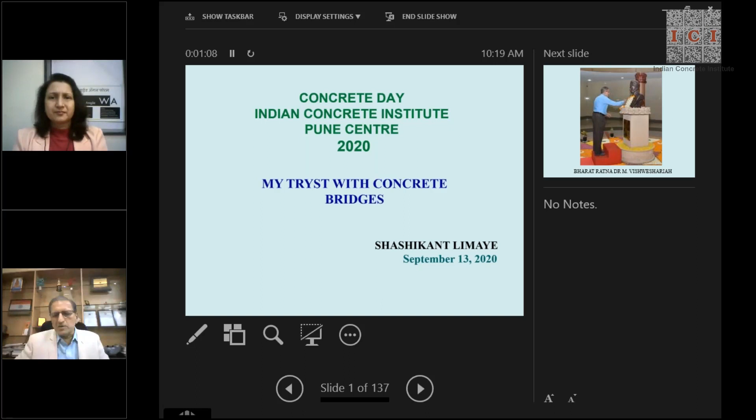Let me first of all pay respects to one of the greatest engineers in India, Bharat Ratna Dr. M. Visvesvaraya, who is supposed to be the father of engineers in India. 15th September happens to be his birth anniversary. He was born, I think, in 1862, so we are very close to the 160th birth anniversary of this great son of India. Let us pay our respects to Dr.

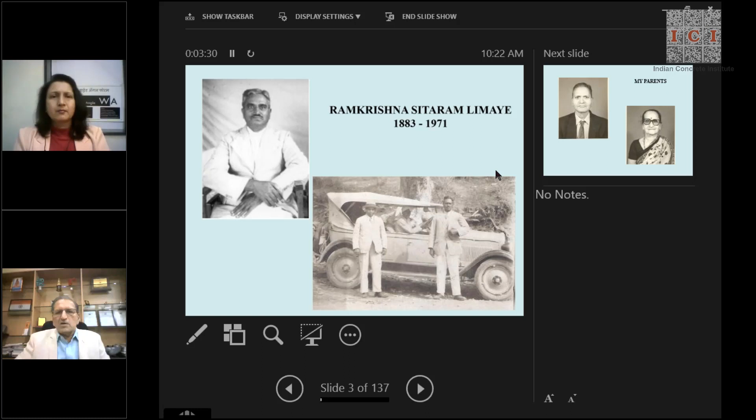My father also was an eminent engineer who practiced in Pune, and he was a very reputed consulting engineer and valuer in the city of Pune, Mr. G.R. Limaye. He happened to be the secretary of the Institution of Engineers in India, Pune Centre, which with his great efforts was established in today's condition, that is the construction of the building and other assets. He was secretary for, I think, more than 8 years. At that time, I remember in 1961, as a boy, I accompanied him to Bangalore to attend the annual session of Institution of Engineers.

And the famous Sir M. Visvesvaraya happened to be the chief guest at that Congress. So I had an opportunity to have a look at Dr. Visvesvaraya.

Now I'll just speak about my gurus. Dr. E. Sridharan, I consider him as my greatest guru, because working with him for 8 years, practically 24/7, has given me so much knowledge and confidence, which is perhaps unique in our profession. That is what we'll be talking about partly during this presentation, about the Konkan Railway Project, how we went about it and how we were able to accomplish it in such a short time without any foreign assistance in terms of consultants or even equipment, except for a small portion of equipment which was brought from Sweden for constructing the tunnels.

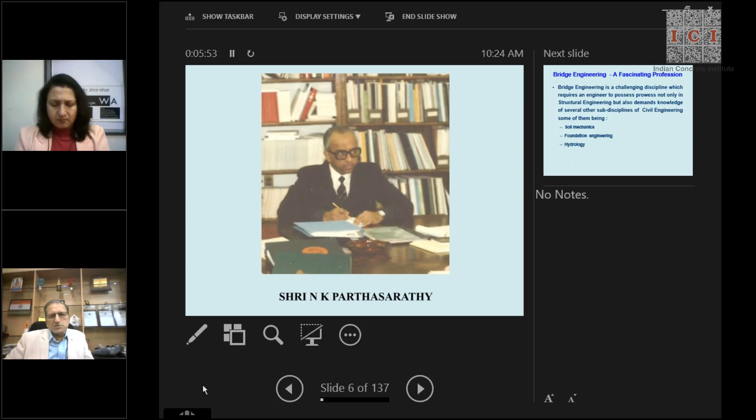Coming to bridge engineering, as all of us know, the biggest component in bridge building is concrete in one way or the other. In fact, you'll find that more than nearly 80% of work in any bridge is concreting work of one type or another. Bridge engineering is essentially a very challenging discipline in which an engineer possesses not only prowess of structural engineering, but also demands knowledge of several other sub-disciplines of civil engineering, such as soil mechanics, foundation engineering, hydrology, etc.

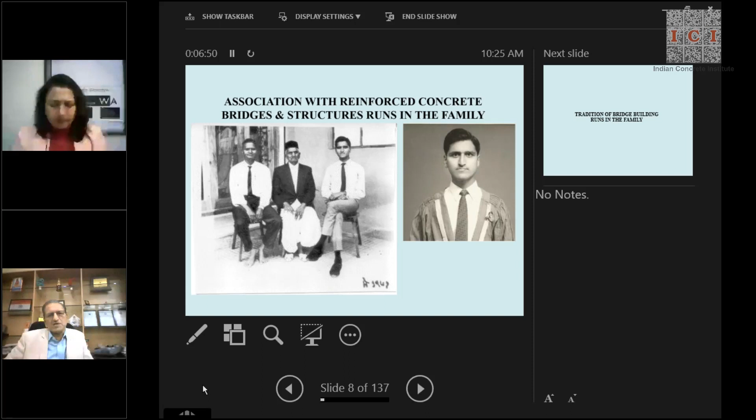When I graduated in the year 1971, fortunately my grandfather happened to be there, and this is a very historic photograph of 3 engineers, the 3 generations of engineers in our family - that is my grandfather, my father, and me. As I said, the tradition of building bridges runs in our family.

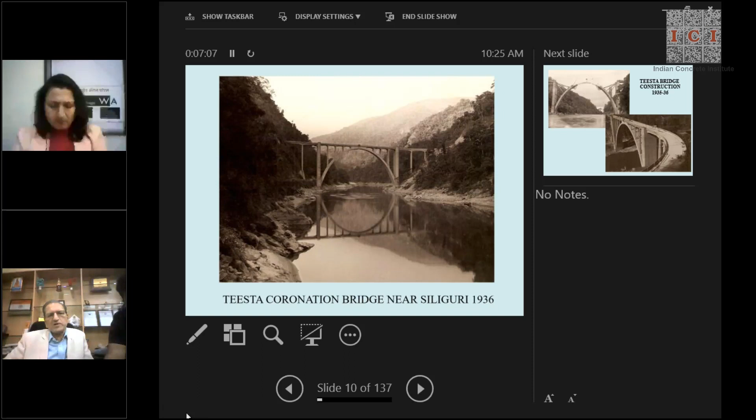This is a very beautiful bridge which exists today also, across Teesta River, very close to Siliguri, constructed in 1936. You can't believe that such a bridge could be constructed in 1936, with a span of 200 feet and a height of 300 feet.

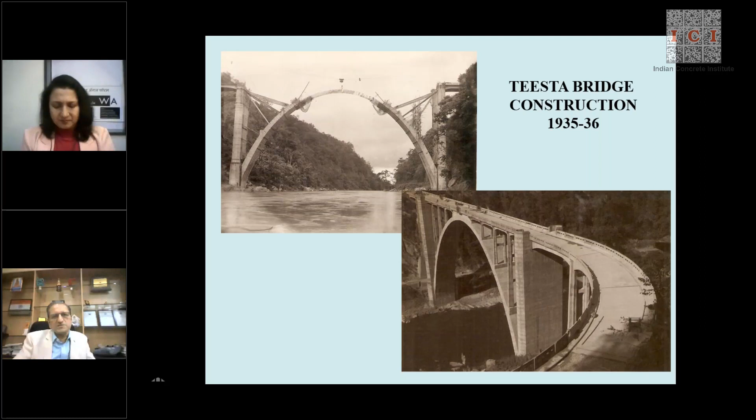You can also see the quality of concrete. He always used to tell us that the type of precautions they used to take in making concrete was very great, and no low quality work was accepted. There used to be British engineers at senior positions, and they all used to stay in tents at such sites. This is a finished bridge which exists today also.

If somebody goes on that road towards Gangtok, you can find it very first when you enter the Teesta valley.

You can think that at that time, although the analytical techniques of today were not available, everything was done on slide rule and log tables. They could conceive and construct these types of bridges with great confidence.

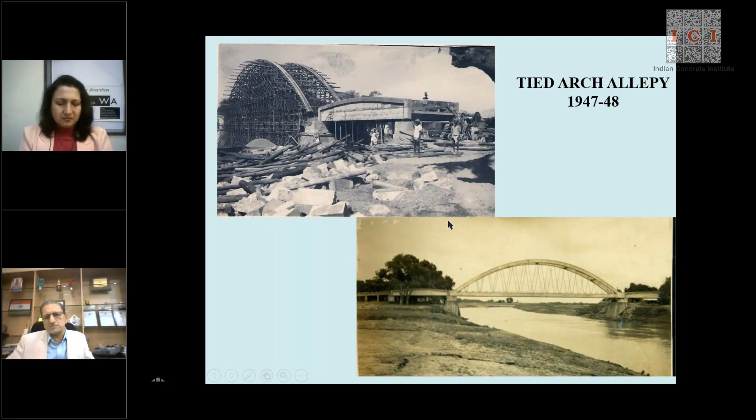In fact, the problem arose with the open spandrel spans because of cables and those problems, because they didn't have that kind of material at that time.

What today's engineers think by looking at computer analysis is that if the pier sinks by 3 inches, so much movement will come into being. To my mind that is not true, because there is high redistribution which occurs in such kind of structures.

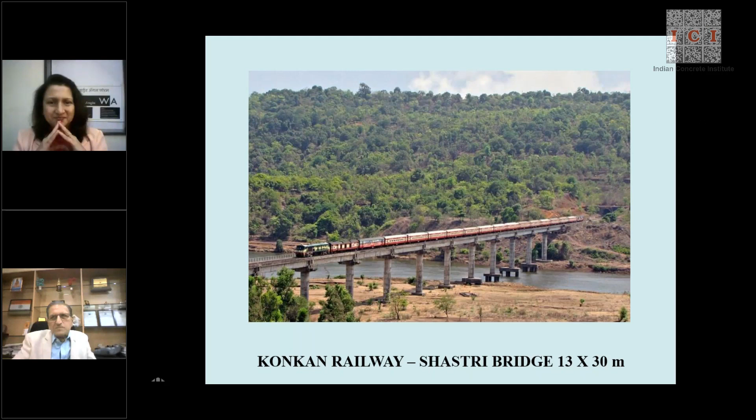Now coming back to my career in the railways, I joined in 1974 and underwent training for nearly 2 years of various types. Then my first posting was in Ahmedabad.

At that point in time, Sabarmati Bridge had developed problems - it was basically mass concrete piers on well foundations, and two of the wells got tilted. Therefore it was decided to replace that bridge with a modern structure.

That was the opportunity to introduce RCC in a big way. Those mass CC piers and wells were in between the existing piers, because in railways in such areas we can't change the alignment. One side is the Ahmedabad Yard Complex, the other side is Sabarmati Yard Complex, so we can't change the alignment.

We had to construct on the same alignment, and therefore we thought of having pile foundations, because any well foundation between the existing wells could have endangered them further due to sand blow and similar issues. So this was, to my mind, the very first bridge in which RCC cast-in-situ bored piles were used in a scourable Sabarmati bed, because earlier the wells had tilted only because of scour.

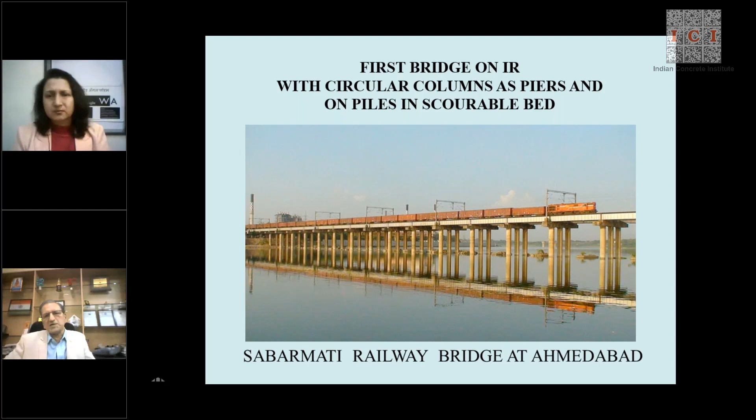Despite that, with great confidence, this was envisaged, and this bridge is standing today after nearly 45 years. It is in service, and there are 3 tracks on top. The idea was that each circular column will support 1 track.

This entire job was done in a matter of 2 years, because particularly in such situations it is necessary to construct it preferably before the next monsoon.

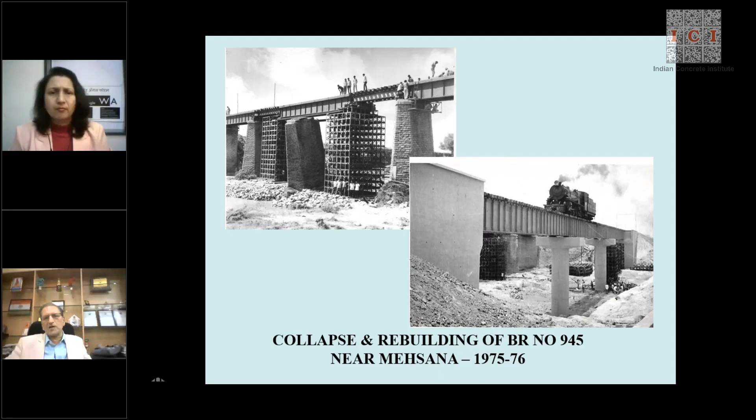This is what happens in the railways sometimes. The entire bridge, 14 spans of 60 feet, just vanished within 1 minute on the Rajdhani route, on the Daman-Ganga river near Valsad, north of Valsad.

This was a challenge because Mumbai-Delhi, as you know, was the busiest route even at that time, 1976, fully electrified. The loss every day was 2 crore rupees, and it had to be restored on a war footing.

Our Ahmedabad design office was one of the best offices in Western Railway, and we used to do all designs internally - there were no consultants at that time. Since half of the monsoon was yet to pass, we were in the middle of July, and therefore we needed something in the center of the bridge which would stand the test of another flood, because the Daman-Ganga's catchment gets very high rainfall.

So we thought of a pile trestle, done with RCC piles, bored and cast in situ, socketed in the rock. 4 piles were to support each support of the girder.

The girders were what are called Callender-Hamilton girders, 150-feet span, bolted and assembled at site and then launched by pushing forward. There were in fact 3 trestles to support 2 girders, and this whole operation was finished in a matter of 2 months. By September, this line was recommissioned, and the new bridge was constructed in just about 8 months along the existing alignment.

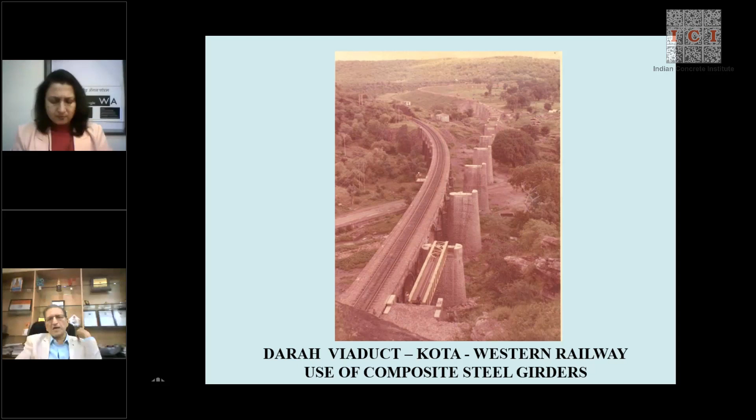Thereafter, I had a great opportunity to work as a professor at the Indian Railway Institute of Civil Engineering. I consider that after having field experience of something like 10 to 11 years, it was a boon for me, because I had seen the difficulties in the field, and once you have field experience, you know what to look for.

The Indian Railway Institute of Civil Engineering had one of the best libraries in the world as far as railways, railway bridges and tunneling were concerned at that time. We used to invest about 5 lakh rupees every year to buy books, and I happened to be on the committee to select books for that library.

At that time, another... can I interrupt here for a second? Yes, no problem, yes.

Since we've had this wonderful start where you talked about the heritage of our journey as a nation, recognized as one of the largest networks of railways, I have a question. We are now in the 70s as you're talking - would you say that by this time we already had a pool of talent in the country trained and ready to handle all the challenges? At what stage do you think our country was in the early 70s as far as railways and development is concerned, according to you?

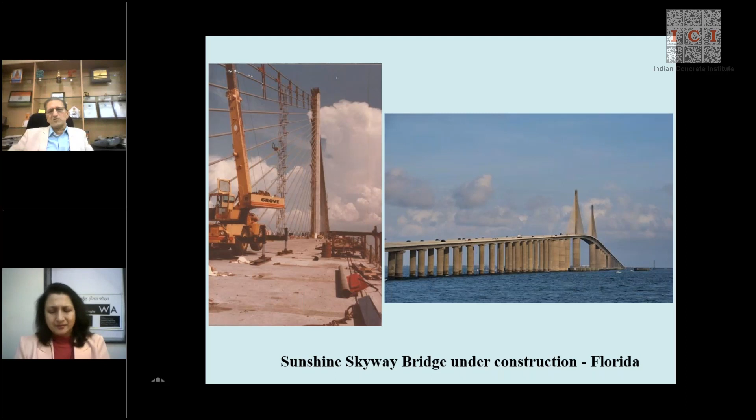That's a fantastic anecdote, sir.

The great experience I had about pre-tension girders came handy in Konkan. This was, I think, in Virginia, a precasting plant where they used to manufacture precast girders for bridges, 60 feet, 80 feet, 100 feet, on standard designs of DOT. You just have to telephone and order - I want 80 feet HS80, HS40 or whatever loading - and they are just available. They'll be put on the trailer and sent to your site. So that was the great advantage of standardization.

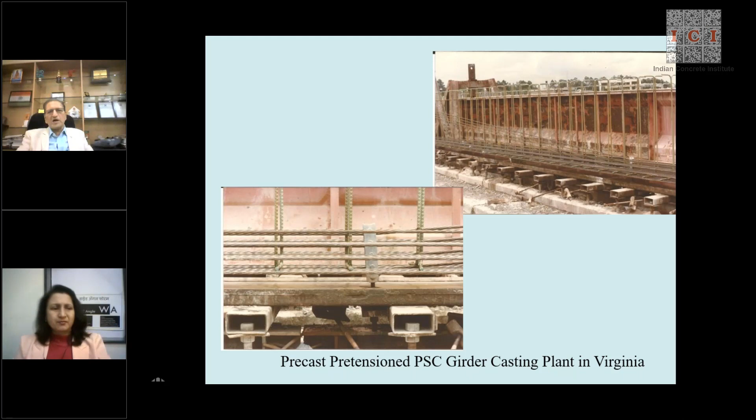We think that in pre-tension we can't give a profile. But here is an example where a profile is given by a deflector which is attached to the base - you can see at this point - and the cable gets deflected. So that problem was avoided, particularly for longer spans. Once it is cast, this thing is released, and the cable remains there, already embedded.

Now coming to the most important tenure in my life. When the Konkan Railway Corporation was to be established, it was decided to execute this project in a BOT mode. The company was to be formed consisting of partners - Ministry of Railways, State Government of Maharashtra, Goa, Karnataka and Kerala, five partners - and the shareholding was decided. But Mr. Sreedharan, being the member engineering at that time, started building up the organization immediately when he was in the post.

And he selected the initial team, in which I was lucky to be there, because Sreedharan's method was that he used to inquire with all the champions where you have worked, what is your background. So he picked me up for the design and planning of the Konkan Railway project, and that is how I landed in Konkan Railway.

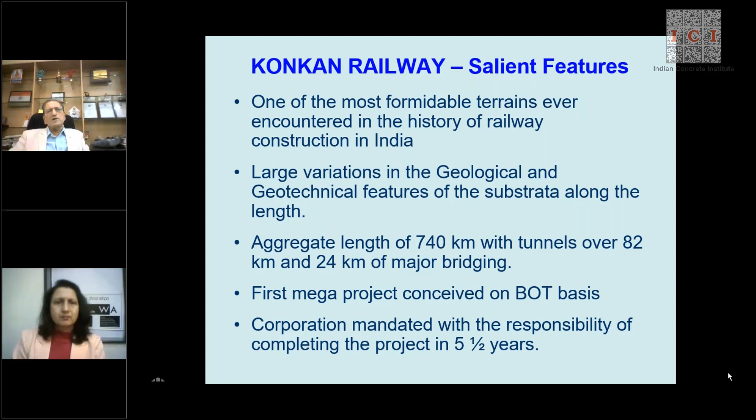There's also a story that this happened on, I think, 4th August of 1990. Sridharan had retired on 31st July, and he did not become MD at that time - he was a one-man expert committee, OMEC. So George Fernandez was the minister, and he used to issue direct orders from his office that so-and-so be posted in Konkan Railway to be relieved immediately.

I happened to be in Pune giving a visit as a visiting faculty that day, although I was senior divisional engineer in Bombay Central, looking after the entire assets of Bombay division in terms of track between Mumbai and Virar, and also the buildings etc. I suddenly got a call from my divisional railway manager that I was required back immediately. But I had just finished my lecture during lunchtime, so I thought some problem must have arisen with the track or some accident must have happened, because such a railway call happens only when there is an accident.

So I immediately went by Deccan Express, and he said as soon as you come to the office, whatever time. I think Deccan Express lands at 7:30, so I immediately went to Bombay Central. He was sitting, so I said, what happened? He said, this is the order, and I'm asked to relieve you immediately. So please, your handing over letter is ready - I have told my assistant, you just sign and walk out.

But I said, what about the handing over? He said, don't worry, you are in Mumbai, so you come back whenever you have time and explain to your colleague what all things are to be seen. That is how I was relieved, and the next morning I had to report in Central Railway, because Central Railway was looking after that at that time.

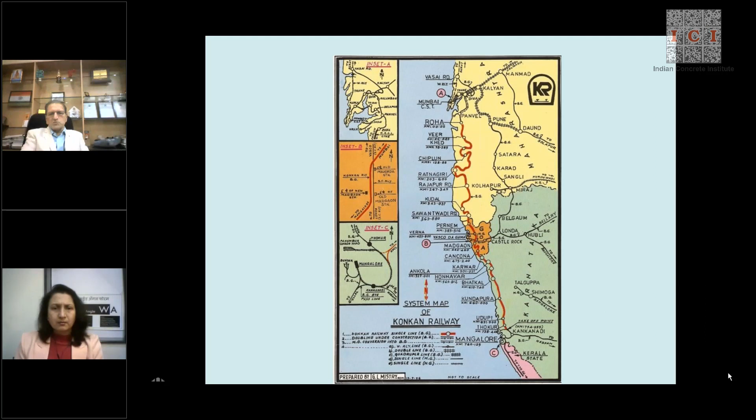Organized structure, first thing was lean but effective. Trust, teamwork, time frame, and delegation. Delegation is the most important word, which doesn't happen in India. Everybody wants power to himself.

Sridharan said no, first of all the chief engineers will be in the field. So all the chief engineers were posted in 7 locations along the alignment, from where they used to operate, and they were given sufficient powers, financial powers, within their zones to decide upon contracts, decide upon land acquisition, and things like that. Then, as I told you, we had complete computer networking, fax, and dedicated telephone, not dependent on DOT.

Modern technology not for its own sake, but to optimize construction and O&M costs, not just for the sake of saying that I constructed a cable stayed bridge on the ground.

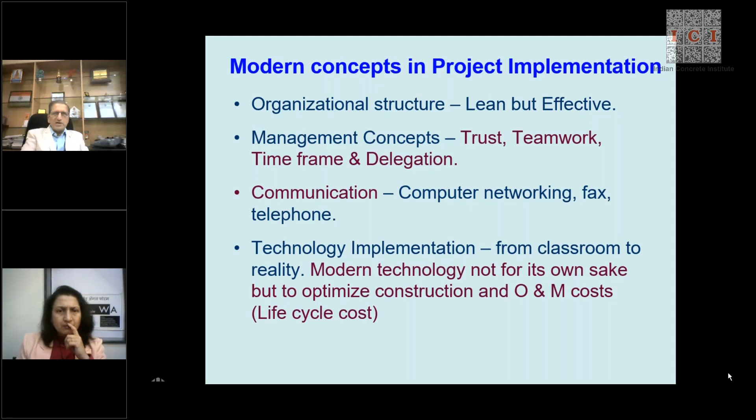That was not done. This was the very first inauguration at Roha in the month of September 1990.

And this photo especially is important because these are the 4 pillars, I call it: Mr. George Fernandez, Mr. Sharad Pawar, Mr. Madhu Dandavate, and Mr. Sridharan. They were the 4 pillars because it was Sharad Pawarji who immediately agreed to this idea of forming a company with partnership of state governments. And that is how the other state governments had no alternative but to say okay and go ahead.

Now the most important item. One question. Can I ask one question before we move on?

Just a simple question. You mentioned that to have competent professionals at all the various locations, you employed competent engineers who would look after their particular territory. So obviously you must have put an ad in the paper, or what was the modus operandi of appointing these engineers, and why did they select to come out of their comfort zone and work in totally unfamiliar territory?

Essentially, at the levels of chief engineers and deputy chief engineers, he got people from railways who were highly experienced in construction, because he knew the Janampatri of each person, having sat as the head of the railways. So he scanned that and got people who had already worked, like a few of the chief engineers had worked in the construction of the third Ghat line between Mumbai and Pune, and the third Ghat line between Igatpuri and Kasara. So he knew everyone, and he had worked also in Central Railway.

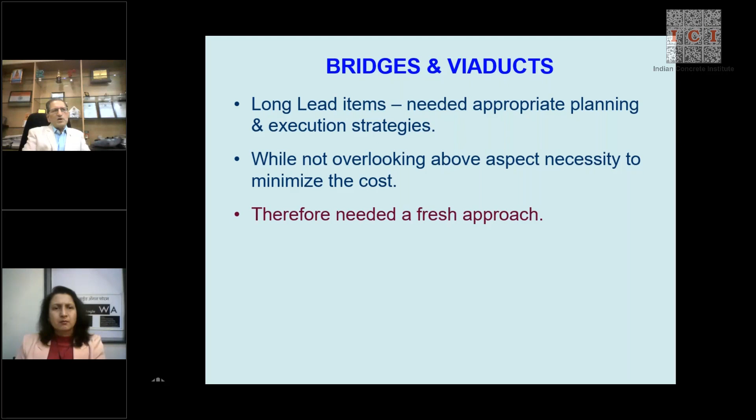Second was also the substructure, which was highly standardized: 16 meter height, 16 to 25, beyond 25, like that. So first was solid circular, mostly up to 16 meter height. Beyond 16 meter, hollow rectangular, hollow circular. Beyond that was tapered hollow. Hollow pier was first time adopted in India.

So we chose a uniform track structure, which gives the advantage that you have the same track on the bridge as on the approach. So you can continue continuous welded rail. The entire thing on Konkan Railway is long welded, there's no joint, no fish plated joint, right? And this gives a great advantage in increase in speed.

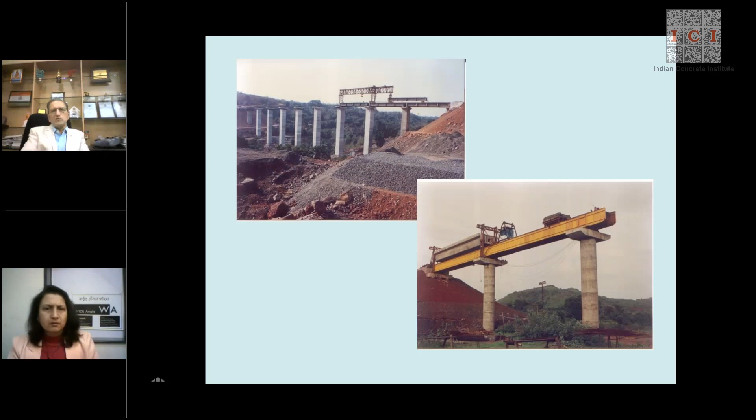The next one is how innovation can be used in difficult times. This is a bridge in Terekhol on the border of Maharashtra and Goa, and also the Chapora bridge next to it, at Terekhol and Galjibag, South Goa, where the port captain suddenly said that an 18 meter clearance between the pile caps was not okay for him.

He said he wanted navigation there. Because of our philosophy, the girders were already cast. At that point he said, no, I want a minimum 26 meters between the pile caps. So I thought over it, and thought why not have H type piers with a central portion of 12 meters. I stretched the 20 meter span to 32 meters and got 26 meters clear between the pile caps.

That is how we built these bridges, where you will find the piers are H-shaped. This is possible due to the moldability of concrete, that I can give any shape to it. That is the thing we want to understand, that concrete gives full flexibility to play with any shape. It depends only on the mold you create.

Then for pre-tensioned girders, how were they produced at site? APCONS came up with a great idea, Mr. Joshi, that we'll have a prefab casting bed consisting of U sections of concrete which are assembled together at site by pre-stressing. There are 11 sections.

After casting, they can be taken to the next site. It is inside this that the girder is cast, and it acts like a reaction frame too, just like we do with a steel reaction frame. The cycle time was 48 hours.

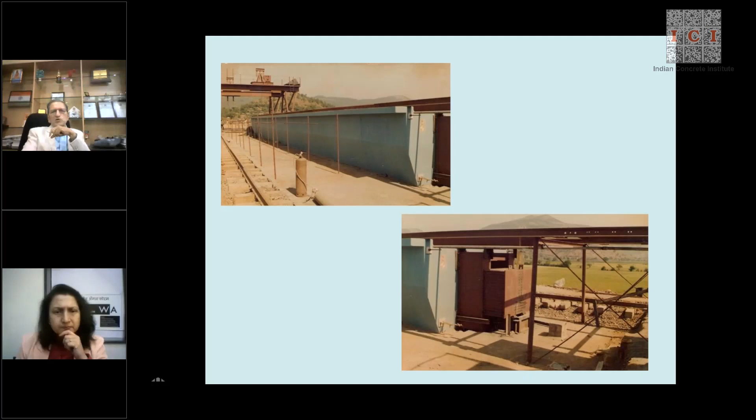These were 20 meter girders, each weighing about 78 tons. That is how they were produced, put in the yard and simply launched. You can see the finish of that Savitri Bridge, which still stands just like that today, after 25 years, and how open it is for waterway clearance.

This created a lot of dispute, because one year in Mahad a heavy flood came, as it happens every year, and it happened here too. People said that this bridge caused the flood. At that time Sharad Pawarji was the chief minister. He immediately phoned Sridharan Saab, and Sridharan Sir said he would depute Limaye to explain it, because he himself wasn't very good at it, he didn't know Marathi, let's say.

So he said, we'll discuss at site. We fixed up a place from where this bridge and the river could both be seen, and he said at 10:30 on such and such date. On that date I went at 10:30, and he came exactly at 10:30 from Mumbai. I showed him, see this bridge, first of all this is 10 kilometers downstream of Mahad, and if you add the waterways of all the bridges upstream, it's double that.

So then he said, let's see. We went there, then we went to the rest house where he told his party people, I have seen it and it's fine, but let Limaye tell you. So he told me, you tell them. Then I explained it to them. He said, okay, now you people are convinced, so let's go to the people.

There was a meeting of citizens in the hall. He went there and said, you don't speak, I will speak. He spoke for 5 minutes and finished the job. He said, I have seen it, it's okay. And apart from that, I must tell you that your river is full of sand.

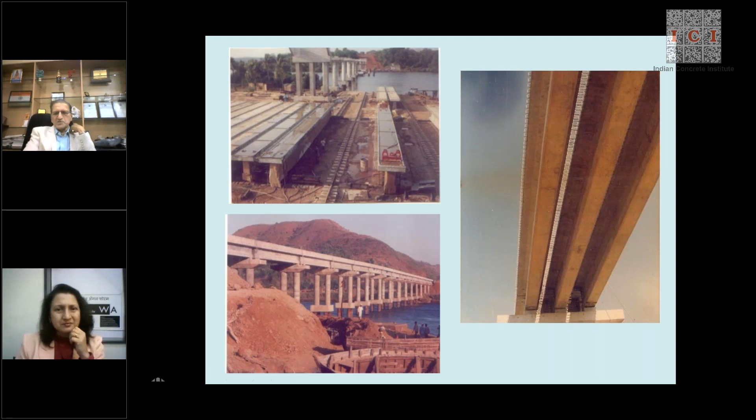It was the first time that we provided a footpath along the bridge for the safety of gangmen. First time we did that, so we have a footpath on every bridge.

All the foundations are pile foundations, for the first time on a project of this magnitude, because I had great confidence after doing a lot of work in Western Railway, even in scourable beds. So we had complete pile foundations for all the bridges, except for I think 11 wells in Zuari and Mandovi, where we had special situations and longer spans.

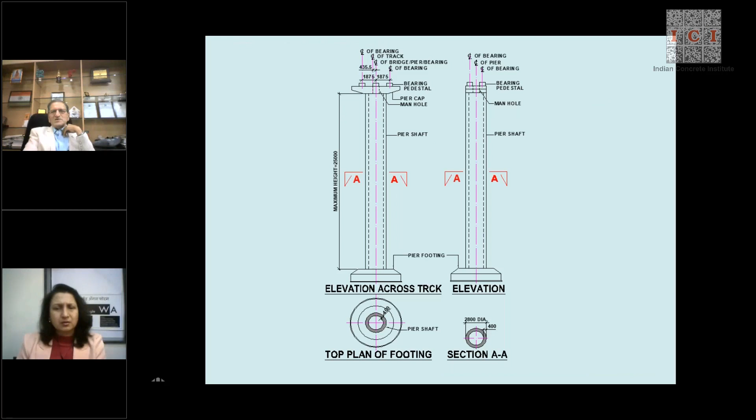The hollow rectangular pier concept was inspired by Linn Cove Viaduct in North Carolina, where we attended numerous presentations during our USA visit. This really impressed me. They built this in an environmentally sensitive zone between the Shenandoah and Smoky Mountains in Virginia and North Carolina. The whole bridge was constructed from the top - you won't believe it - they never entered the jungle except for the foundation.

So, as I told you, hollow rectangular and hollow circular shapes were developed for these viaducts, which we did for the first time using slip form. We thought, if chimneys can be done by slip form, why not piers? With slip form, the speed became 3 times faster. We designed the mixes accordingly to achieve a speed of about 24 centimeters per hour shift for the slip form, and we trained contractors in that.

We also maintained the beauty of the landscape. You can see the Shanti Viaduct, one of the most beautiful ones, at Vaibhavwadi, where we adopted buried abutments - something I had seen in America. Those who have visited the US may have noticed that most abutments there are buried. Here, the river is very small but the valley is large, so I didn't need to cross it entirely by viaduct. We constructed part of it as embankment and part as a bridge across the river.

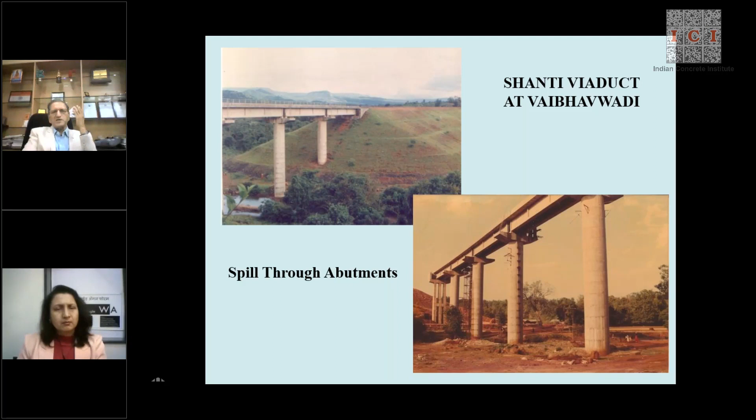We brought the embankment right up to this point, and this is a buried abutment with only 3 pillars like this, buried under the earth. Most viaducts in Konkan have buried abutments, and we've developed beautiful greenery on top. In fact, today if you see it, you won't be able to tell it's an embankment versus jungle. This was the first time you got such a bridge in India, and this inspiration came from Los Angeles.

We had visited the Century Expressway in Los Angeles, where there was a heavy axle load railway line on top that had to go above the expressway, and they adopted this kind of U-girders. Today everybody talks about U-girders being developed by Systra for metros, but that's not true - this existed earlier. We have become slaves again to foreign countries, and that's very bad. It doesn't go well for Atmanirbhar Bharat. We must be proud of what we have done.

And these girders are standing like brand new today. U-girders were designed by Mr. Atul Bove of Mumbai, based on some designs I brought from Caltrans, which were transferred here - how to do it, the methodology. I think this one was 20 meters. We also had 30 meters at Narwada.

We had 4 locations. The advantage is that the embankment height goes down by 3 meters. We were on the approach to Kumta town, and we had land acquisition problems, so 3 meters down means nearly 20 meters of strip is saved on the land.

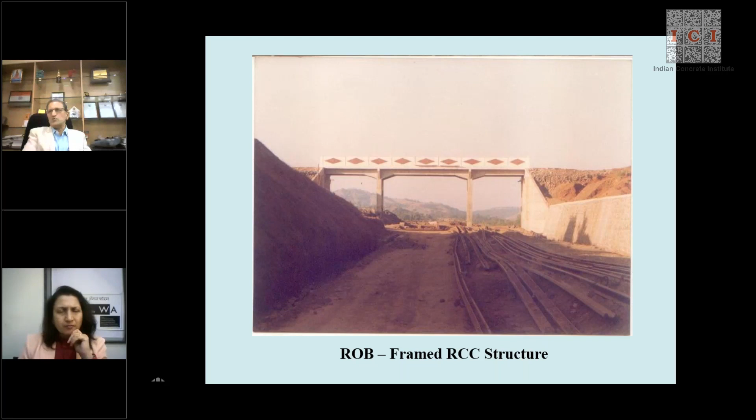This is a beautiful framed ROB, which cost at that time only 9 lakhs rupees. I had found that comparing providing a bridge versus a level crossing, the break-even point was about 15 lakhs considering manning rate etc. So this bridge came in at 9 lakhs just because we framed the whole thing - there was no simple support.

This can be called an integral bridge, but an integral bridge in railways, again for the first time. Like I showed you, Gammon did it in the 1930s - why can't we do it today? Dr. Nori of STUP was very much interested in pushing this technology, and I also said, why not go ahead, please design it. This is a 14 meter slab span integrated with a pier, which is only 850 millimeter thickness and a height of something like 16 meters, and I think 3.5 meters wide.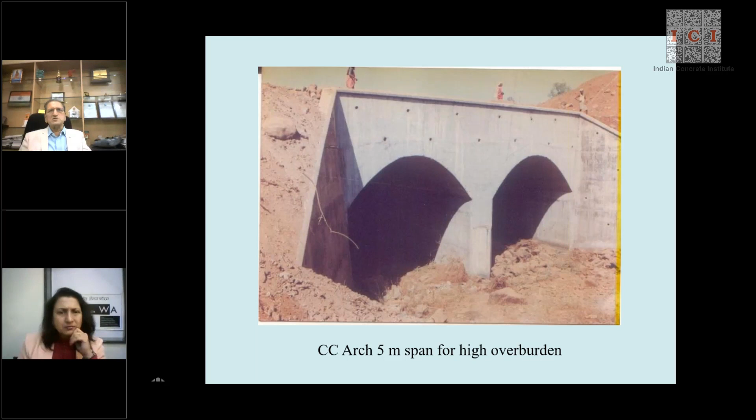Now coming to important bridges, curved bridges. Why not have a curved bridge? That is the question in the mind of the people, and they try to unnecessarily hit the river at right angles. Hitting the river at right angles is okay when you have solid concrete piers, which create obstruction. But when you have RCC, why follow that rule? You have completely open type piers here.

The bridge is on a curve. This is the longest bridge, the Sharavati, 2 kilometers long, constructed in 3 years at that time with precast, pre-tensioned, 30 meter PSC box girders. And this is again the 1.4 kilometer long Kalinadi bridge, 30 meter spans, precast box girder. And you can see the straight line.

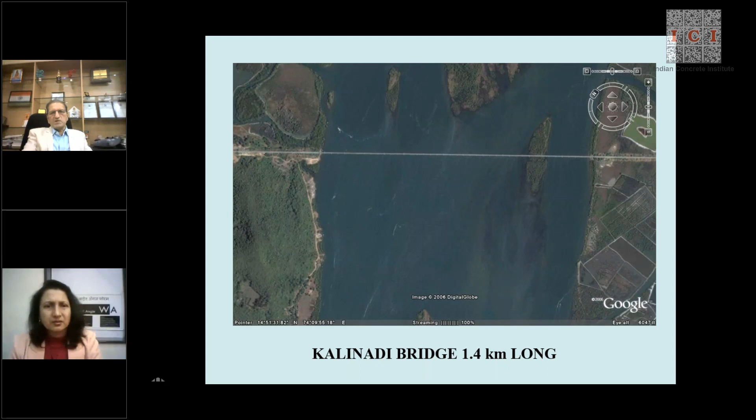And at that time you didn't have GPS. Mind you, all these curves and all that, no GPS - conventional T2 theodolite. And tunnels become even more serious, because if you go something wrong, then you have it. There also it was T2.

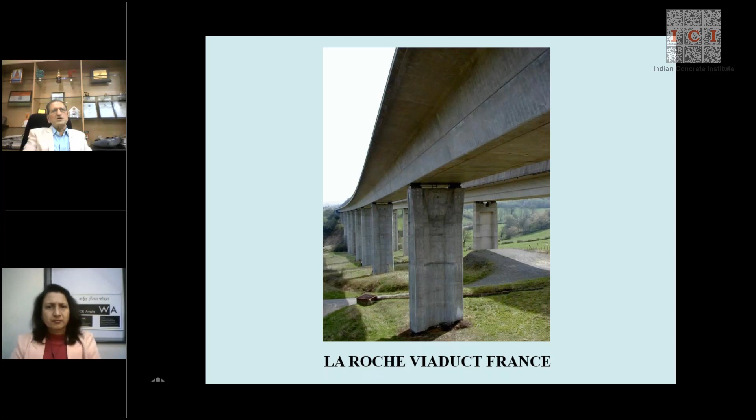Now, Panvel Nadi Viaduct concept. Why is this bridge continuous span, and why implemented with incremental launching? The inspiration came from the La Roche Viaduct of France. When I was professor, I had bought this film, and I used to show it often to the students - an incremental launch girder in the TGV line, which ran at 250 km/h at that time.

So the idea is that in a simply supported system, fixed-free, you transfer the railway's longitudinal force to this pier. Practically, for a 20-meter loco, the tractive effort is 50 tons, so 50 tons gets transferred here. As the height increases, you have a problem.

Moment. So in order to minimize that, suppose I make this continuous and put a sliding bearing here with Teflon and stainless steel, then your coefficient of friction goes down to 1%. Even with a factor of safety, say 5%, worst condition, then it is limited to the weight of the girder multiplied by 5%.

So if you have the weight of girder and train, which is not much - say a girder of 30 meters, the weight is 300 tons, 300 tons at 5%, that is the force. So it comes down to 15 tons. You can imagine the economy.

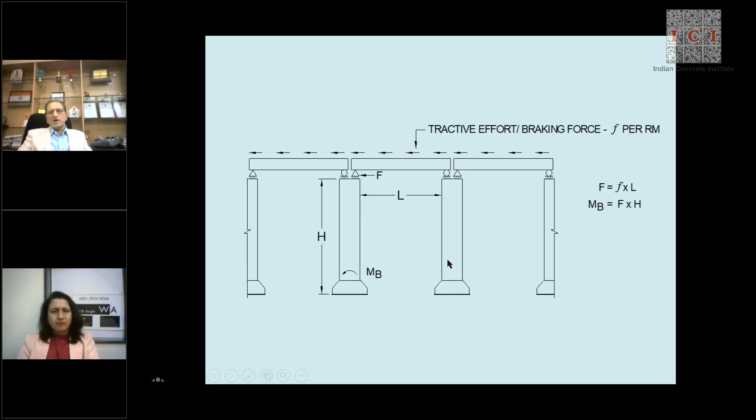And when you come to tall piers, this is a problem. In the Panvel Viaduct, the pier height up to the foundation top was 64 meters. You can imagine if I apply a 30 meter, 40 meter girder, what will be the moment and what will be the size of the pier at the bottom. So the idea was that we should have a continuous span with all floating, sliding bearings, and fix it on an abutment which is rigid because it's very short.

Abutment is hardly 10 meters, as well as the pier of 60 meters. So the whole deck of 425 meters is fixed here. And when the train passes, majority of the longitudinal force is going to get transferred here, and it's designed for that.

This has got end spans of 30 and 40 because of continuous span philosophy, end span supported. Many people were thinking how will this happen, but this bridge was completed in 24 months by Indian contractor L&T, first time they did this in their life, with great accuracy.

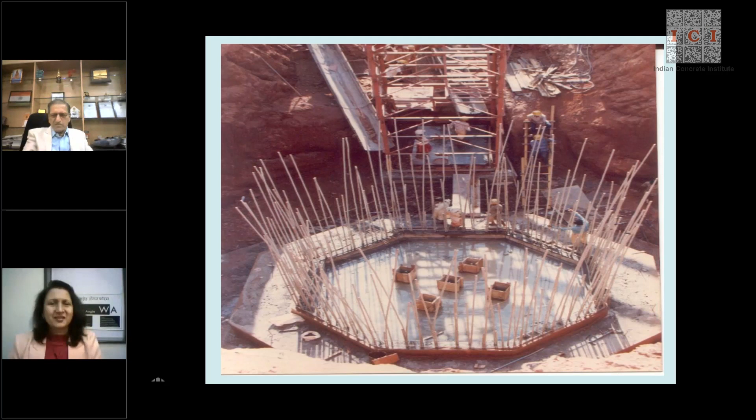The launching is done from one end, so every 20-meter segment is pre-cast and attached to the earlier segment. But when you see the final bridge, you will not see the joint. That was the accuracy of casting. This line is absolutely straight for 425 meters.

So that's what I said, India can produce, and that's what BBC said. This is the bridge. And the Japanese chief, when he came to Konkan, he asked me which foreign company did it. I said no foreign company, it's India.

But today, at the drop of a hat, we get the tower fabricated for the signature bridge from China.

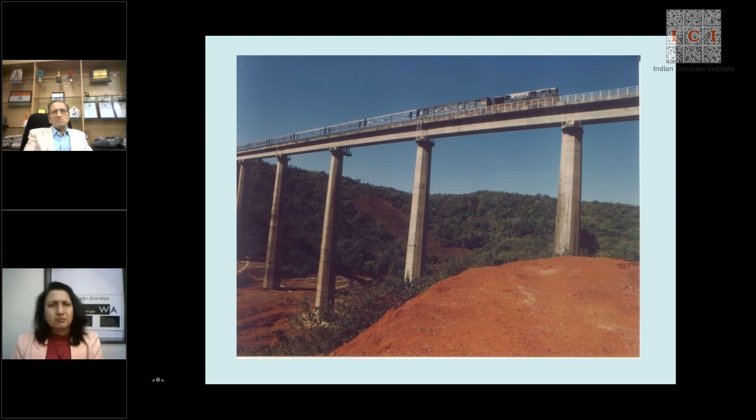This bridge got many awards, on behalf of my team, the team of contractors and consultants, which I am receiving. This is the ICI Maharashtra Chapter Award for the best constructed bridge in India in that year.

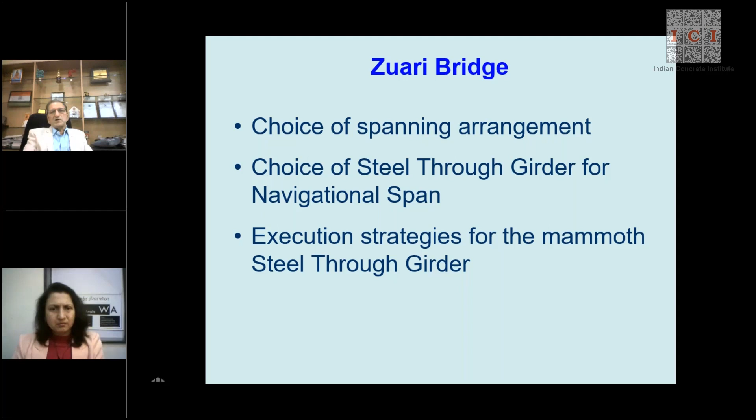The Zuari bridge was the most challenging assignment, and choice of spanning arrangement is very important. This had a 120-meter navigational channel, and therefore we had to have two steel girders of 124.2 meters, the longest span on Indian railways at that time. That also was not railway standard design. We designed it so that the compression in the top chord is more or less constant.

The approach we have built up, like in Florence, you must have seen the bridge across the river in Florence, where we build up the span as we go to the center. This has got a clearance, as well as foundations in the central part, and 5 foundations in the approach. All these are on well foundations.

So the challenge was to put the girder there. This is again a precast concrete box, 53-meter span, weighing 800 tons, which is transported on a barge specially designed for that. We casted it at Zuari site and took it to Mandovi site for the Mandovi River, and launched it there for the purpose of Zuari.

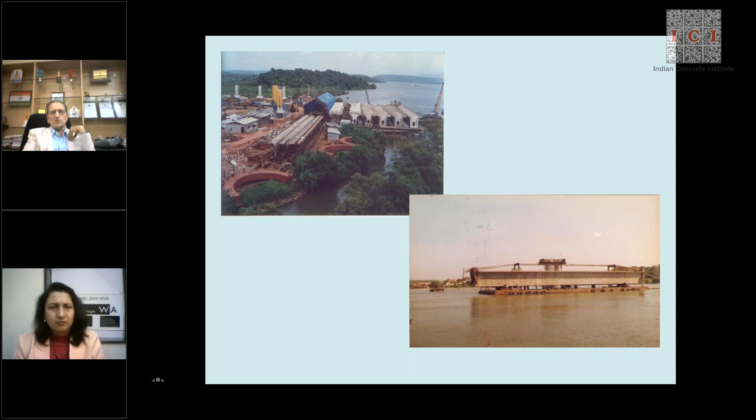Done by, of course, my great friend Kashalkar, who must be listening to this. Credit goes to him. Then the wells were prefabricated on the shore, the bottom part, the cutting edge, and then it was put on the dock barge, mounted on the dock barge, taken to the site and lowered in there. And then the well was built on top.

No island could be constructed because of the environmental situation, so it was done like that, no island was made. This whole girder, 124-meter span with 18-meter height, was assembled at site, but it was fabricated in the railway workshop. I'm proud to say that, because contractors didn't come forward with proper conditions.

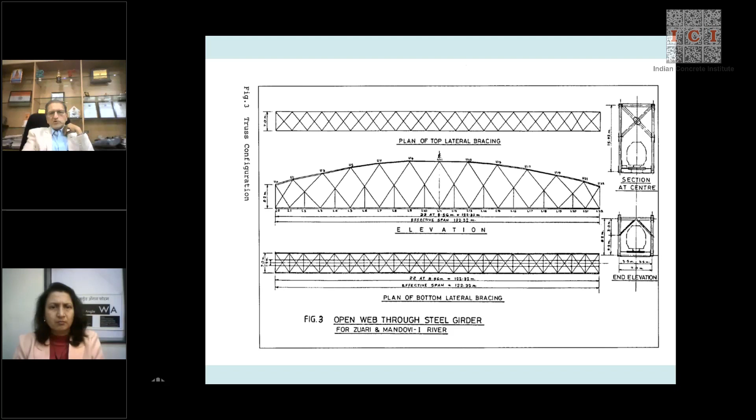We went as a single tender to Central Railway, and they fabricated 3 girders in a matter of 1 year, where we supplied the steel. It was so accurate that it never happened that a component did not fit.

This is how it was assembled on the shore, pushed, a big operation, the most difficult in my life, to push these girders onto a jetty and then lift it by this barge-mounted crane with a 46-meter overhang like a bird, because we used the same crane we used for the concrete girder.

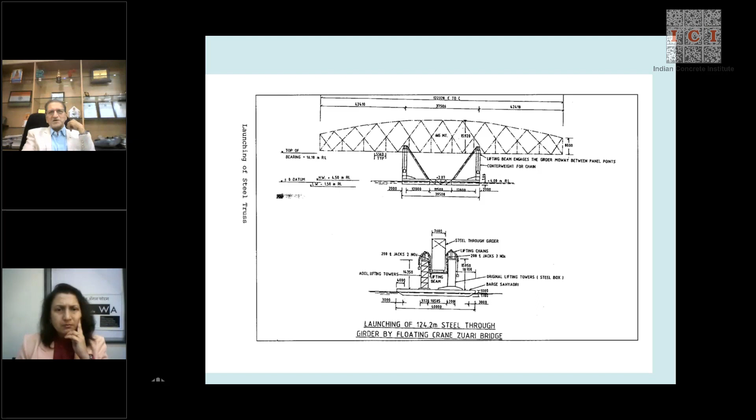And this is the way. You can't imagine this, a 400-feet girder being carried on this barge, towed to the site, and then lifted by the 4 towers here.

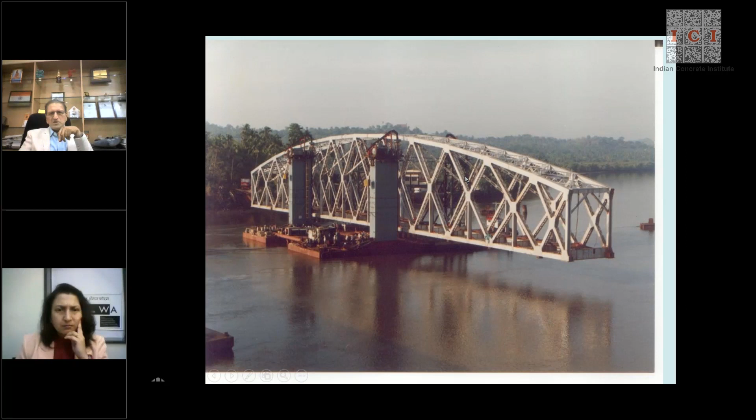Wow, and this is how finally it comes. There are many more slides, but that's a separate subject, so I won't deal with that. But this is how it was made.

This entire operation must have literally been a heart-stopping exercise, if I may call it that.

The first operation happened on Mandovi Bridge, where I, as chief engineer, was sitting from 5th of May to 21st of May 1995. We used to sit with Mr. Kashalkar and Mr. Joshi and all the teams for nearly 18 hours every day, right up to 12 at night, and again back at 7 after going to the rest house, which was far away. That is how this operation happened, and it was heart-stopping because we had to release the river on 22nd of May. That was the condition of the Captain of Port, because after monsoon starts we can't do it. If we hadn't finished by 22nd of May, we would have lost 6 months, and the entire timetable would have got upset, because the same was to be used in July.

There was a lot of heartbreak too, that I will write as a separate story. It was not easy by any stage. Another important thing I forgot to tell you - this whole project was stopped in the Goa sector from Tivim to Bali because of environmental reasons. Despite that, the contractors did not leave the site.

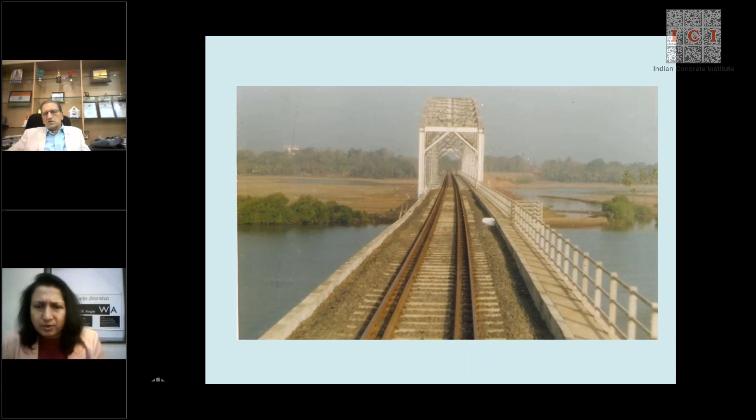So survey was done by conventional T2 theodolite, although electronic theodolite, E2, had come by then. But the systems were safe - one had to walk on the ground. Without that, you can't do this. Today, people don't even walk on the ground, and then they land in problems because ultimately one has to walk on the ground.

Again, the first circular vehicular tunnel - people think metro did it first, but no, it was done here. These segments were designed in India by us, erected using systems fabricated in India. This is a 300-meter length of one tunnel at Honavar, near Sharavati.

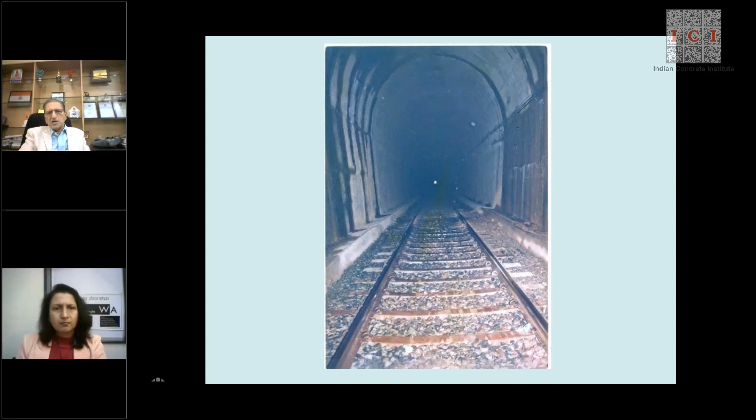The next is the funicular shape, because our places were very high, so we thought of this. This is a funicular, multi-radius design, so you get compression all the time in the ring to the extent possible, and the bottom is closed. You can see the hole at the other end here too. Its total length is about 1.3 kilometers. You can see the shaft in between where light is coming in, and you can see the last hole.

This is another standard tunnel section. We had standardized the tunnel designs - we didn't go to consultants. We had standardized designs for each situation, and that is very important. Today for everything, even hard rock, we are running to consultants, and they are giving such heavy designs.

Recently I was involved in the Karwar tunnel, which is absolute granite. There, they have huge shotcreting, rock bolting, and heavy supports, when it can stand on its own - like the Ghat line from Mumbai to Pune, done in 1865, still standing well without all this paraphernalia. But today, Himalayan terrain design is transplanted into hard rock, and that's what's happening, under the name of foreign consultants who don't know an inch of our land. That is what basically perturbs me.

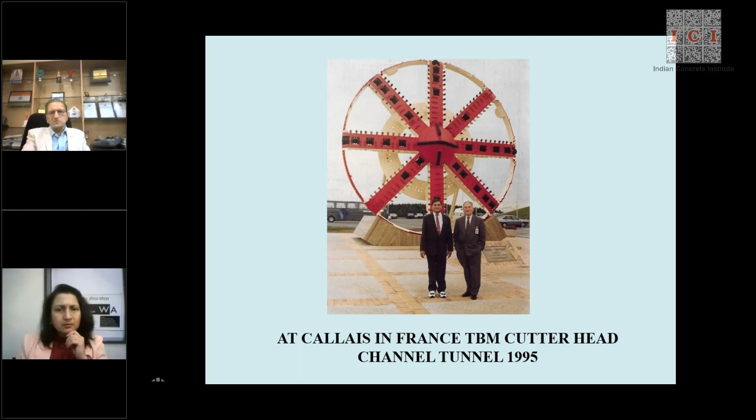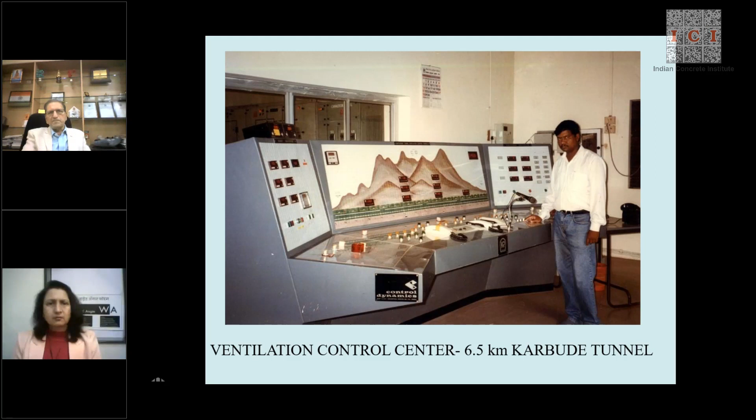These young engineers whom we recruited at that time are now at the top of the table - they are GMs and AGMs in most of the metros and big projects. We had recruited quite a few.

I'm amazed that you remember all their names - you remember the names of all these locations. Probably they are embedded in your mind, so you remember each detail of this journey. We used to work day and night, and sitting in Mumbai, I had to imagine what was happening there merely by photographs, and transmit it by fax. WhatsApp was not there at that time. That would have created confusion probably. Yes.

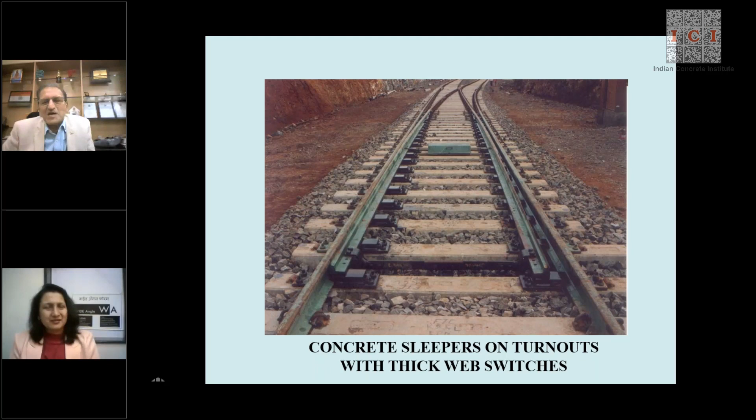When I came back, I made a note immediately - why not have it in Konkan? Because that's the most suitable place, since every day you find so many accidents on NH17. So I wrote a note to COM saying it's a three-way win-win: the truck operator wins because he reduces his cost, railway gets money, and diesel for the nation is saved. I worked out the economics and sent it to FNCO.

We had no interdepartmental kind of situation in Konkan Railway. Everybody used to work together. And Sridharan sir immediately said, yes, okay, we must try this.

Now I think it's more than 100 crores per year for Konkan Railway by taking from Kolad to Mangalore. They run Kolad to Thokur, that is Mangalore. Now, what was said about this, India can triumph in a way that the West is envious of. I think you repeated what SIDA said, but the last line is important: exclusively Indian finance. There was no foreign aid.

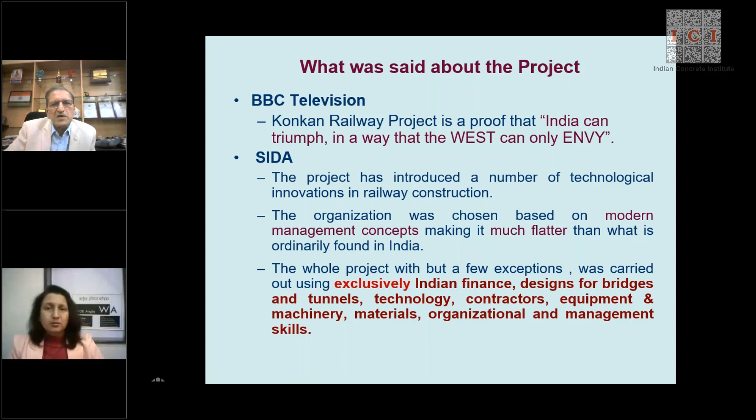Designs of bridges and tunnels, technology, contractors, equipment, machinery, material, organization, management skills. That is what the Swedish International Development Agency said in their report, because they aided us in getting 7 drilling jumbos for our rock tunnels. They gave aid of, I think, 50 crores or something at that time.

Now, just to tell you one small story about this, I think we have a little more time. Based on this, that time MSRDC started a project of expressway, and they had these long tunnels. So one fine morning, Mr. Bongirwar, who was the joint MD, called me when I was going from Colaba to my office in Belapur. He said, drop in. So I dropped in at 9:30 or something at Marzban Road, PWD office.

And then we discussed that this is the plan, these are the tunnels you have to make, how do we go about it? We wanted some technical advice. So I thought it's limited to technical advice. I told him that we deploy drilling jumbos, we have got them, we can sell you the drilling jumbos. Our work is over and you can employ the contractor. After that 1 hour discussion, I went to the office.

By the time I landed in the office at Belapur, the number 10 was on my phone. 10 was Mr. Sridharan's number. So I said, what happened? Let me go. I just rang him. He said, come. So I went to his chamber. And he suddenly showed me a fax. I said, what fax? No. They have said that you discuss this thing with them. Well, I thought that without his permission, I had done something wrong.

No. They want us to take up the work on cost plus basis. They don't want our machines. They want us to take up the contract. And then he said, yes, we'll go ahead. Why not? Let us do it. And then he said make the contract papers ready, cost plus basis and all that, in 1 week's time, and let's go to them. So I made the papers, showed it to accounts.

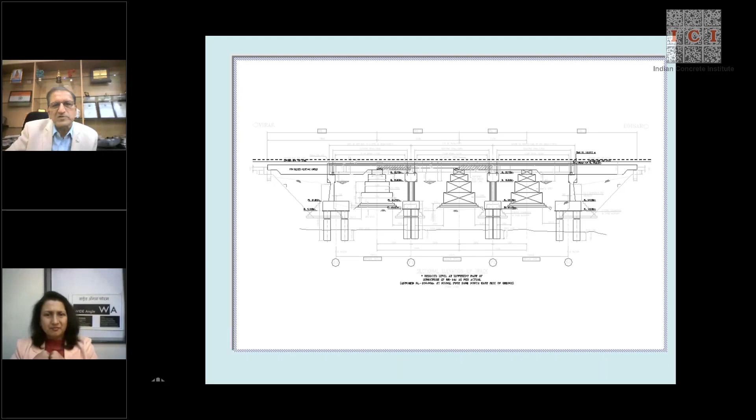This is another bridge which was a challenge for me, thrown by Western Railway CE. The bridge washed away 3 spans of 40 feet near Dahanu on the main line. They restored it within 1 week, but they wanted to build a final bridge before the next monsoon. So he wanted a design which could be implemented in that time. On the same alignment where they had restored it, they didn't have a diversion. So under the bridge, we had to construct another bridge and then transfer the track. So this was the situation when I landed there.

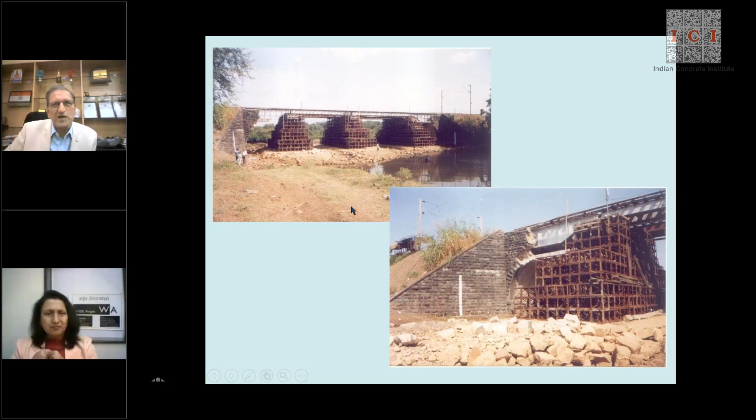These arches had collapsed. We can see one small portion, and they had erected it like this. We had to put piers in between this without disturbing it. So obviously piling was the solution. But again, the space was limited. So we designed piles in a zigzag format, so that we reduce this and get space between the two.

And then the single circular piers and a 40 feet span on top, which is again precast. The span on top is precast units placed side by side, which can be launched during the traffic block of the railway. Now, on the Rajdhani route, getting a traffic block is not that easy, and we have to complete at least one deck in one block.

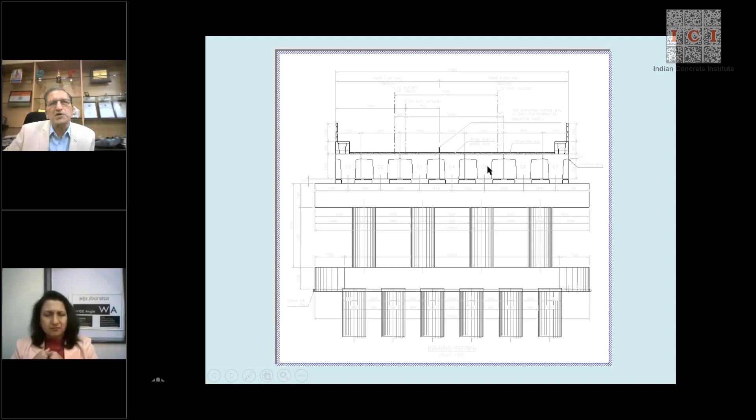Otherwise, the whole traffic to Delhi will be stopped. So this is how it was done. This is a pillar which has come up, and now the units will be laid on top of this pillar. Their depth and all that was based on the highway and railway line levels.

They can't be changed. So this is the final bridge you can see. Girders have been laid 40 feet and the things have been removed. So these are the challenges in railways that you have to construct under traffic.

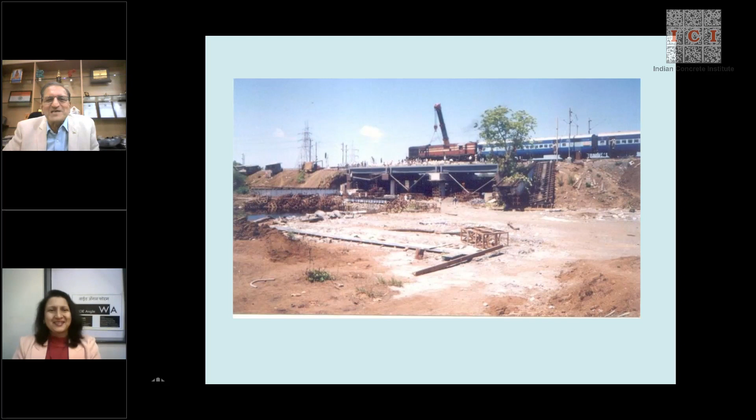One of my designers, when I was working in Owen Williams, we did it at that time. He went to UK, later shifted there, and gave the MIStructE exam. He presented this work, and they were just shocked that we can do things like that. He said, because of this, I got MIStructE. Yeah, they really got surprised that India can do it.

Then a 12-meter wide concrete FOB was a challenge thrown to me by the then GM, Mr. Sudhir Chandra, who must be listening to this, was a member of the TEAC in Pune Metro. He said, construct something different, Limaye, we are tired of looking at the same things. So I said, okay, let me take up the challenge and do something which can be done fast, and in concrete he wanted, not in steel.

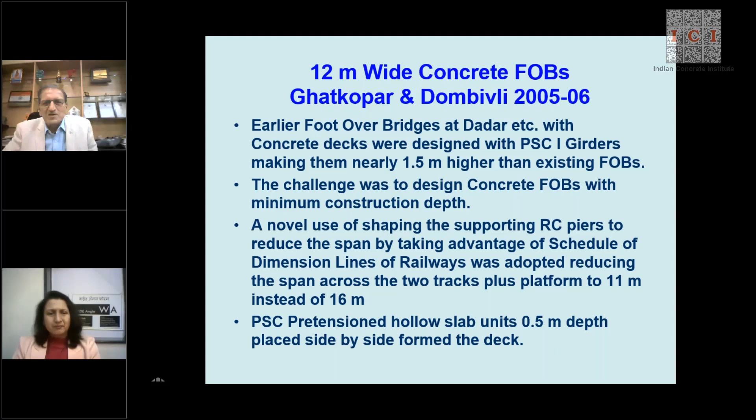So this is how this challenge came, and you can see the way I have done it. Railway has got a schedule of dimensions where there's a Lakshman Rekha like this, because of train movement. So this has been designed keeping that in mind, that we have got a frame which shapes like this and the girder sits here. So I reduced the span to 11 meters, which was otherwise becoming about 16 meters up to the center.

A 16 meter span PSC girder with a normal deck, cast in situ deck, would have made a depth of about 1.8 meters. This reduced it to 1 meter. So 0.8 meter is a saving for people to climb down. How many do it in Ghatkopar or Dombivli, people know? And this is done for the first time.

I used hollow slab units with a pipe put inside, pre-tensioned and pre-stressed, and that's standing very well. You get a very flat soffit and very sleek design. And this parapet is also part of the girder, not done separately. It's part of this girder which is cast.

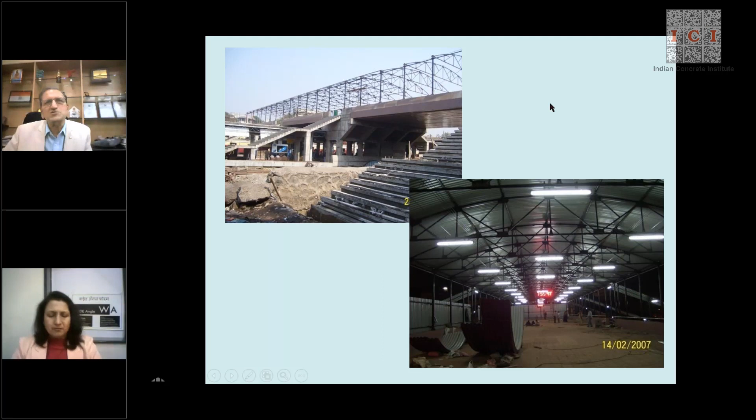See, this is a bridge. This is a frame, and you can extend, multiply it this way. If you want it wider, you can have it wider, because it's just a unitary approach. And this is the top of the bridge. You can see how wide it is.

There was some problem with the team leader, and I had planned the whole work. There, 32 girders of 63 meters steel truss were fabricated at site by BBJ. The very first girder was done so accurately, because we insisted there will be no damage, no welding issues, and all. RDSO approved it on the first trip, which has hardly ever happened—a girder fabricated at site approved on the first trip without any questions. Wow, I think...

Yeah. And this project of RVNL was completed in a flat 3 years by a JV of Gammon and BBJ, because again we worked as a team. Normally in India, what happens? The engineer wants to be very much aloof. The engineer doesn't feel that he's in the war, that he's part of the battle and has to work with the contractor.

Today, what happens? You employ a general consultant, whatever you may call them, PMC. He thinks he's a kind of a third party, Sthita Prajna, so he's just looking at you. They are not supposed to just look at things—there are problems which you have to solve and approve. Today, even the word 'approve' is missing, I find.

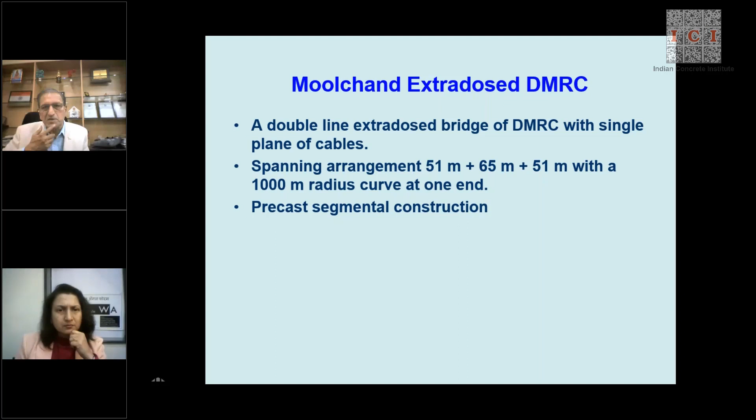Then Moolchand extradosed was after the collapse of the cable stay bridge at Kota. Sreedharan had a doubt, and there was a collapse just before that, I think in Delhi Metro. So he called me and said, can you check this once again? I want somebody to see it. So he gave me this, and we checked it. We didn't find great deficiencies, but we corrected them. This is the first cable stay bridge on a metro in India, at Moolchand in Delhi, and it came out very well.

Beautiful. So we bought a software for this and analyzed it in STUP. This was when I was in STUP.

Then the ballastless track was the most challenging, when Mr. Modi was the chief minister of Gujarat. He had given a challenge to the city engineer that this has to be opened on the 26th of January. I was given this work of track design sometime earlier in May. They wanted a ballastless track basically for the joy train, and I had to develop it and get it implemented. They would appoint a contractor - this was when I was in STUP - and nobody wanted to touch it. Earlier, one consultant took it up, but he gave it back to me, saying he couldn't do it, it's too dangerous.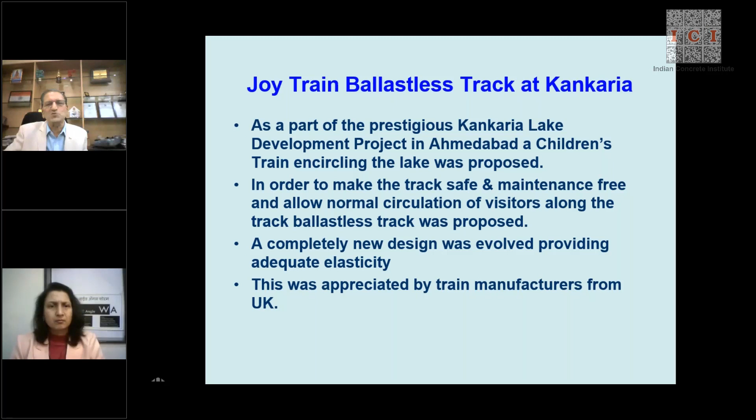And this is Mr. Modi's constituency, happened to be at Kankaria Talao, and everybody was greatly afraid of him. This is a beautiful track built on concrete - I developed a new fastening system. But they had a contractor who worked with us earlier in Western Railway.

I explained to him - just one episode I'll tell you - when the boss is interested, what can happen?

The city engineer of Ahmedabad city used to stand there till night 12 o'clock by himself. Once he called me for a meeting, and I went by the morning flight just to finalize. They had made some trial length in their office and I wanted to see and approve it. So he said, come down. I said I'll come directly from the airport. I went there, he was sitting, and suddenly a phone call came and he said, I have to go for some meeting. After 10 minutes, I find this gentleman is back. I said, what happened, what happened to your meeting? He said, no, that meeting is not important, this is Namo's work. I had to watch all the details today and we'll go ahead. So I said, okay, let's see.

So we made some corrections because there were some problems in implementation. Then immediately it started, and this was completed in time with great geometry. The train was brought from UK, and UK engineers said it was 99% okay. The track is built, this is the train, and I was very happy to see the children in this lovely train, which is 2 kilometers long, around the lake.

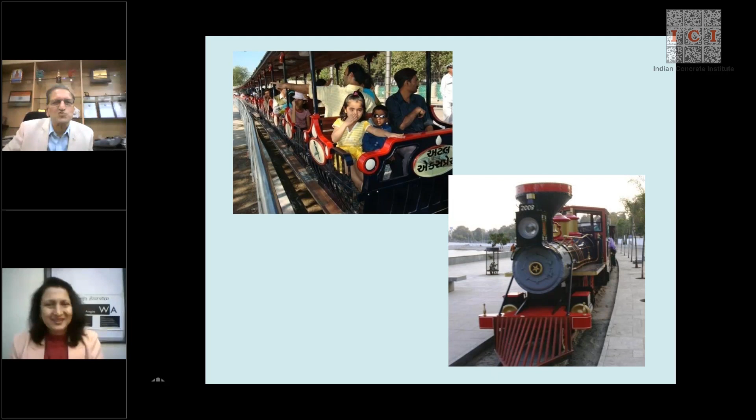Now, the change which I have made in this is very important, which I will show you now. The anchorage has been brought to the top of the concrete deck, not the bottom. I saw this in China when I went there in 2009 for the opening award ceremony of Lupu Bridge in Shanghai. This is basically how they do it in steel, which I saw in Sutong, where they attach this and the anchorage comes on top so it can be maintained and cables can be replaced if required. Now, in a railway situation, imagine if this anchorage goes on top of the track where you have no access - what are you going to do if something happens?

In the electrified territory, you can't do that, you can't inspect. So I said, let us put the plate, but with shear connectors. This plate goes inside the body of the concrete girder, and through the shear connector, it transfers the load.

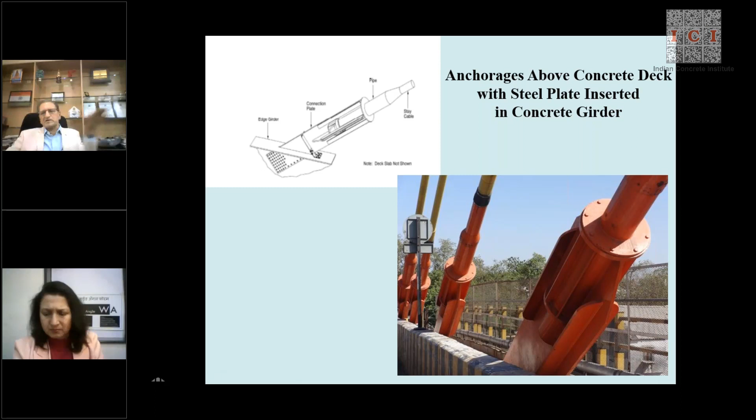That became so simple, because otherwise putting the anchorage at the bottom with live tracks underneath was a great problem from a railway point of view, to give blocks and things like that. The bottom soffit became absolutely flat, and reinforcement detailing became much simpler.

The last one, I think probably the Bhairab bridge in Bangladesh, which is my proud achievement. This bridge consultancy contract of design, bid processing, and supervision was taken by Stoop and Scott Wilson, India. I was the team leader for part one, that is planning, design, and bid processing. This is at Bhairab Bazar near Akhaura, very close to Agartala.

There are total, I think, 26 bridges in this project. The biggest is Bhairab, a bridge across the mighty river Meghna. This was under the Indian credit line of $1 billion, and this particular bridge was costing 1,000 crore takas. This planning was to be done exactly in 6 months, and I landed in March 2012.

It is along the Chittagong railway line, and most of the projects on this line were with the Chinese. I am telling you this especially: the challenge was to be thrown to China, that we can do it. That is what I am telling all the participants, that we have to take up such challenges if we want to survive in the world market.

Africa, unfortunately, we didn't take up. They have entered in a big way, which we could have done too if we had approached it in this fashion.

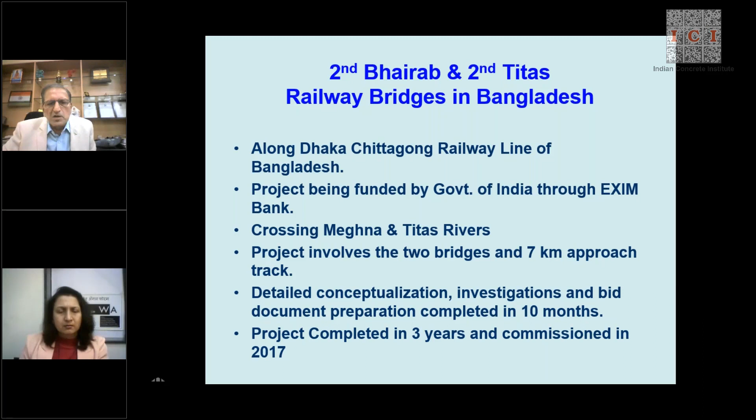This was funded through Exim Bank, with 2 more major bridges and many more, and alignment, signaling, everything was involved. This project was just completed in 3 years after the day of start by Indian contractors, on a bridge on the river like this. This is the new bridge, the second Bhairab railway bridge.

We used, for the first time, 2.5 meter diameter piles. We introduced O-cells for testing. This is the old meter gauge bridge, constructed I think by Hindustan Construction in the year 1936, when it was united India. And this new one was done by us.

And one dargah was coming here. Just for the dargah, I told those people we'll add 3 spans. So we added 3 spans at the earthwork, and the dargah people were very happy. I said, this is a solution, do it.

In fact, the detailing—I'm just trying to explain how planning is important, which I learned in Konkan Railway. The entire survey and alignment, we applied thorough thought to how it will be done, right from: where will be our base, from where the girders and parts will come, where it will be assembled, how it will be launched, how the piling will be done. Every small detail was done and written down in the contract.

The entire design was done by us. The contractor has only to come and implement—there is no design-build, so he has not to look for approval anywhere. It's approved, stamped, he gets a drawing on day one. Go ahead. That is how this was accomplished.

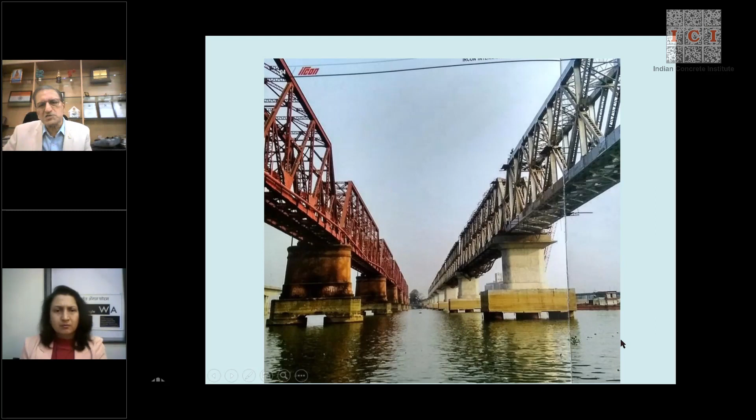You can see the beautiful bridge. They had doubt when we were going so close to the existing line. They said no, I said no, it will work, we can go close. So we had just 40 meters between them. If we had gone more, we would have had problems on both sides, since we had to merge with the existing lines. So just at 40 meters, and done in 3 years.

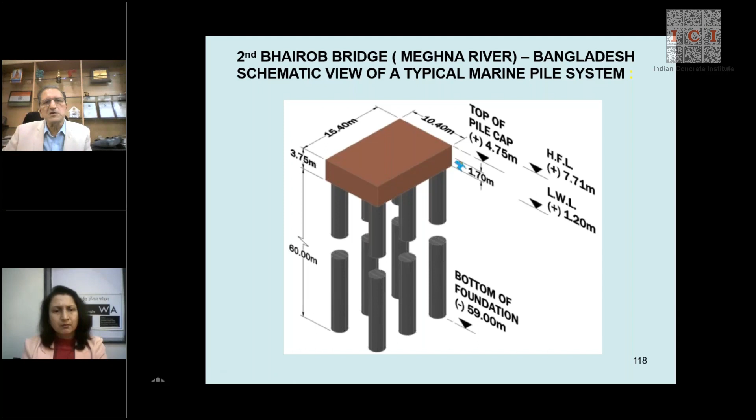This is the layout of the piles: 6 piles under the pier, 2.5 meters diameter, going down to minus 59 meters. The depth of the pile is more than 60 meters from the top, 2.5 meter diameter. These are the sizes you can see, and this is the O-cell.

Just for testing of the pile, we introduced the O-cell, and by hydraulics it presses down under the reaction of this, and then we come to know what is the end bearing.

This is what was inaugurated by both the prime ministers through video conferencing, way back on 9 November 2017. I started the work, I said, in March 2012. So you can see how projects happen even in Bangladesh, if you desire. This was a challenge to the Chinese, because they could not complete the earlier section.

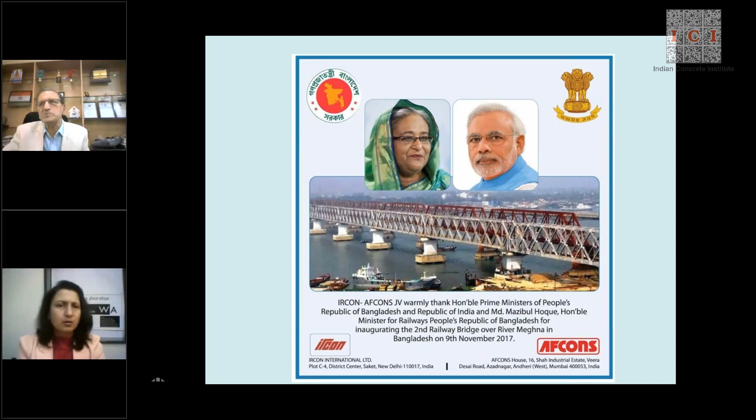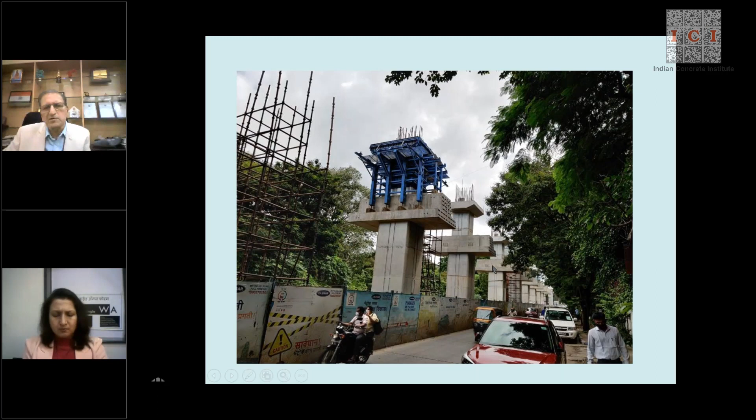This is happening now and people can see this, I think at RTO. This is what match casting looks like, and these are the pre-stressing strand ducts. This is how it happens: the section is brought, joined, cables are threaded, and then stretched. You can see the concrete finish because precast is absolutely well finished.

This work is happening now. For the foundation, there was a problem that there was no space to put a proper foundation, so we made an H foundation, and the pier comes out of this. So this is the envelope, and the pier comes here.

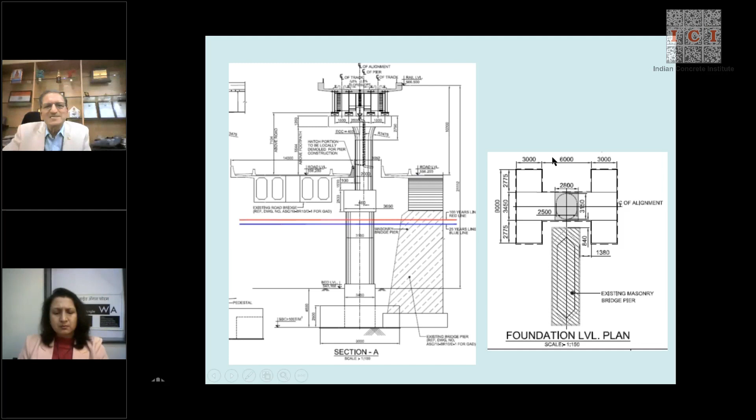Again, this shows the moldability of concrete - what can you do with it. We reduced the size of the pier just to maintain, I think, 200mm clearance between the parapet and my pier, and one side cantilever is slightly larger than the other. This is the way we retained this foundation - we did micropiling and then it was done.

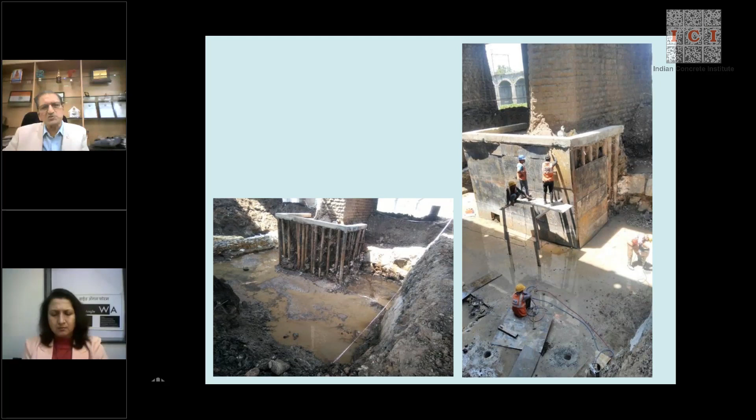I had done this in Mumbai at the Andheri crossing of the metro, and at Ghatkopar, the Ghatkopar-Versova metro which goes across the railway. The same type of thing was done next to the railway track, where some 300 trains used to pass every day. It stood well, and that is what was copied out here.

This is how it is going to come out - it will become like a view from some foreign country, with the piers coming out from here. These are the 4 bridges: this is the oldest bridge, this is Garpure's bridge, and these are the 2 now constructed.

Otherwise the line would have to go here, and then we would have to spend time on land acquisition in CME. As you know, the defense forces - how much time they will take and how much money they will charge is anybody's guess. And this is how the viaduct looks.

Again, the whole thing is precast now, everybody knows this, so I need not talk about it. We have gone ahead with great quality and shown great progress.

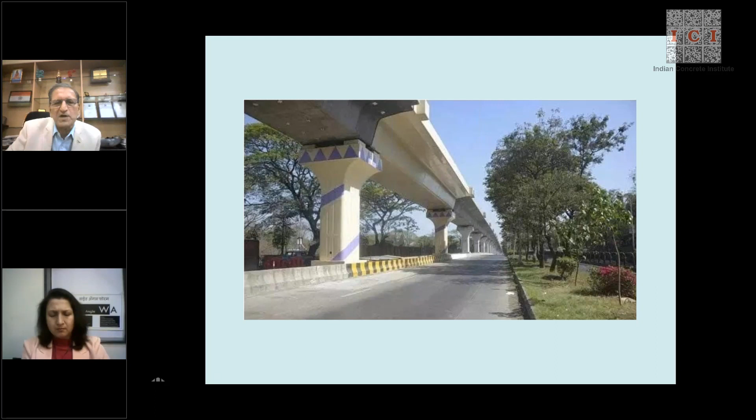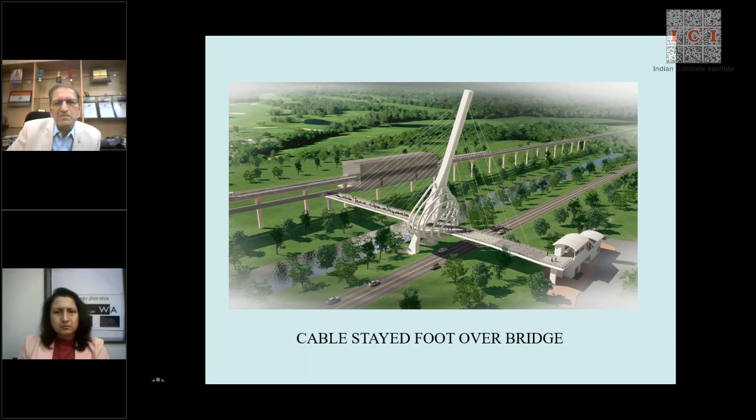What I want to give you in the end is this: we are all caught up too much with the disease of fear and danger. History is not made by cowards. So engineers, unless they move confidently and have the confidence that we can do it, nothing is going to happen.

I showed you right from 1920 how people used to work with confidence at that time - what we did, what railways did in earlier times, like the Assam Rail Link and so many projects, the Third Ghat Line, so many difficult projects, and later the Konkan Railway.

But now, in this century, we have deviated from that path, and we want so many people to carry our cross. The cross has to be carried by the concerned agency - it can't be carried by others. People must always remember that. You can't put a gun on another man's shoulder and fire it all the time. Then we won't be able to achieve anything.